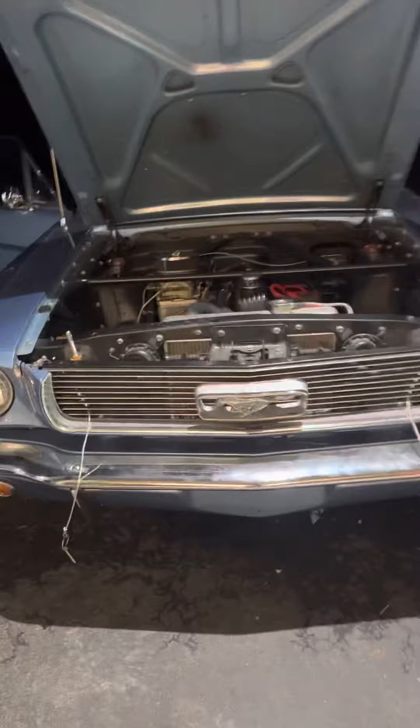Okay, I just want to make a quick little video here about T5 swapping these early six-cylinder Mustangs. This is my '66. Aluminum headers, roller rockers, all the good shit. Originally, this was a C4 automatic 3-speed car. Then I went and switched it to a 3-speed top loader car. I put all the mechanical linkage in there and whatnot.

And now it's going to go T5, and the T5 is sitting over here in the passenger seat. Car's waiting to go up on the lift tomorrow. Got a buddy who's going to help me out. I'm going to throw it in there. Hopefully it should be a one-day job. As you can see, I pulled the transmission, the bell housing's off. Got the new flywheel bolted up. It's really just waiting on time to get it in there.

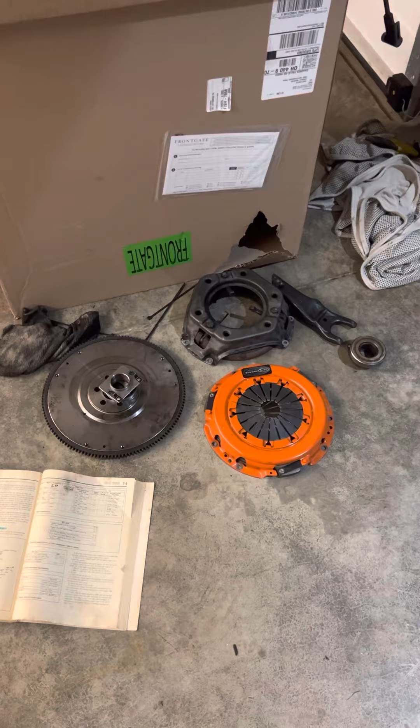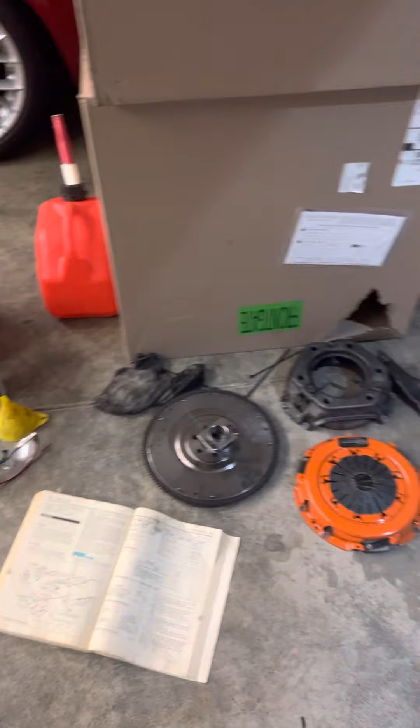But I wanted to make a quick video kind of about all the information I've collected on, one, how to manual swap these cars, and two, how to do the T5 in it, or what I think is the best way to do the T5 in it. At least the way I'm doing it. Because there's not a lot of information on how to modify, especially hop up the 6. And I feel like the more videos people make like this, the better off everybody will be.

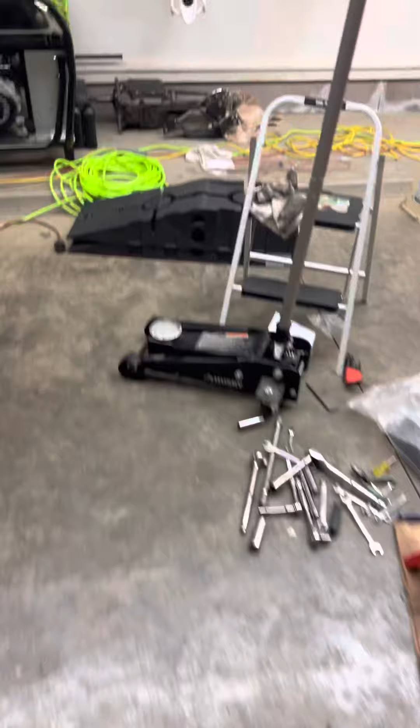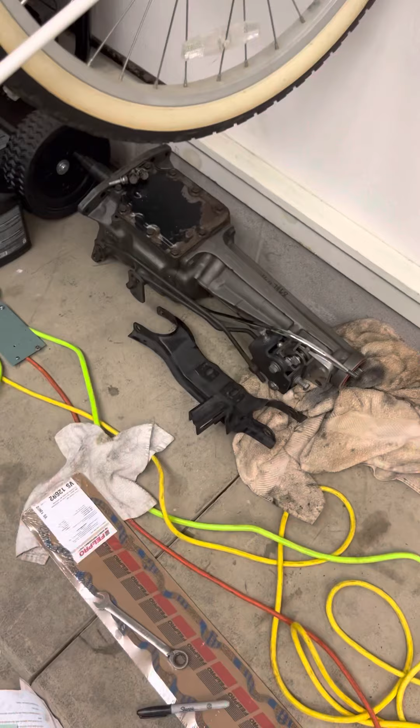So I guess we'll talk 3-speeds, and we'll talk top loaders first. So this is a 3.03 top loader, and the other option for a 3-speed top loader would be the 2.77. They're fine. They work really great. I thoroughly enjoyed mine. Having the dogleg first gear was pretty cool. Dragged this one out of a barn. I bought 2 of them for 120 bucks. They're everywhere. Look on Facebook Marketplace. You can find one. The 4-speeds are pretty plentiful too, if that's the route you want to go. Because it's definitely cheaper than the T5.

That being said, none of this is cheap. None of this is about competing with V8 cars or, you know, arguing about who's going to be faster or whatever. I don't really care about that. And I think if you own one of these 6-cylinder cars and you hop it up, it's not really what it's about. It's more about if you want to do it and you want to make something cool.

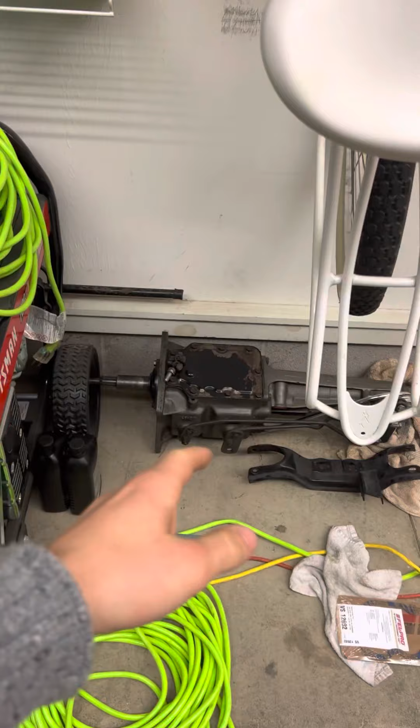Anyway, so the 3-speed top loaders, you got the 2.77 and 3.03. The 2.77 is pretty much junk. Came in only 6-cylinder cars. It doesn't have a synchronized first gear. Not super great, especially when they're as plentiful as they are. So I think if you're going to get one of these, you're better off getting the 3.03 or upgrading to a 4-speed of some kind. That being said, if you just want to manual swap your car and then eventually you're thinking about a T5 swap, that's what I did.

The 3.03 is the way to go for one very important reason. It has a 28 spline output shaft. Conveniently enough, the T5 also has a 28 spline output shaft. So the yoke that Modern Driveline is going to send you is going to be 28 splines. And in theory, if you already did that swap, it'll slide right on. Also, I measured that in the car and measured the T5, mocked it up with the adapter plate and whatnot. Comes in with maybe a quarter to a half inch difference, the T5 being about a quarter to a half inch shorter. So I think I'm going to get away with the stock drive shaft without having to modify it.

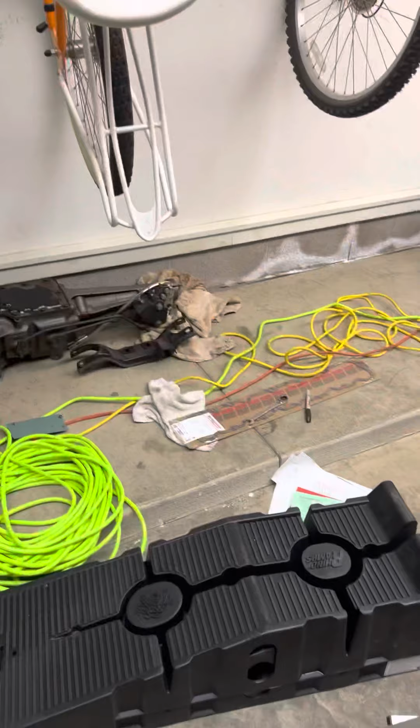The other thing is if you go top loader, you can use the mechanical linkage, okay? Which I have pieced together in this car. It's all new stuff. You can buy it from CJ Pony Parts. This is the equalizer or Z-bar. There's the push rod for the clutch pedal. And then there's another push rod, which you're not going to be able to see, that actually pushes the clutch fork, otherwise known as the release fork. But the bell housing is not in. Obviously, the clutch fork is not in, but it would be right there.

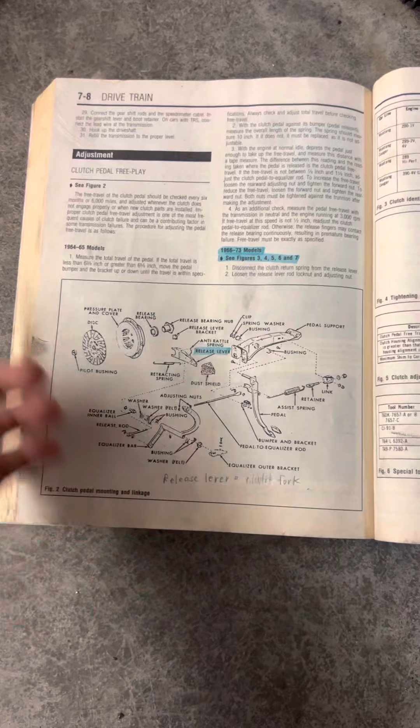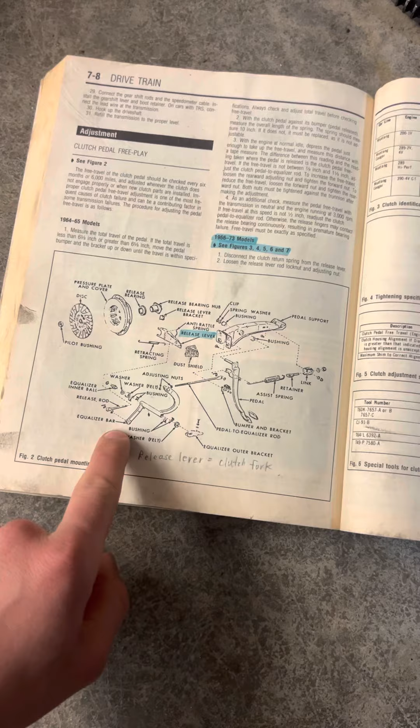Had great difficulty figuring out what the fuck this clutch linkage looked like when I was doing the swap initially. So I got myself a Chilton manual, and they actually have everything laid out pretty nicely. This picture is, for whatever reason, stupid hard to find, but this is absolutely everything. They call a few things a different name. They call this an equalizer bar. A lot of people call it a Z-bar, I guess because it vaguely resembles a Z. They also call the clutch fork the release lever. Whatever, tomato, tomato. But that is the picture you're looking for.

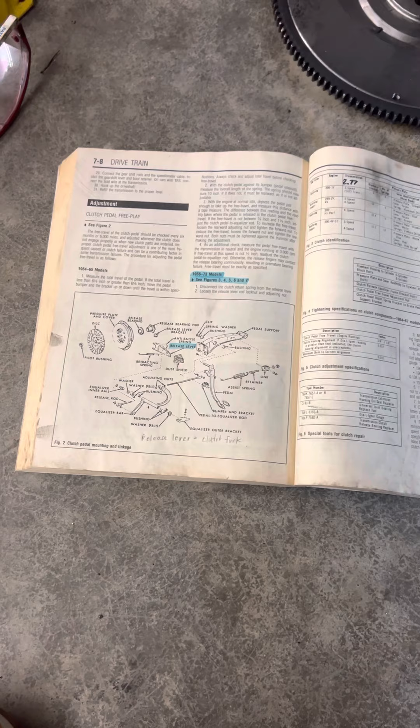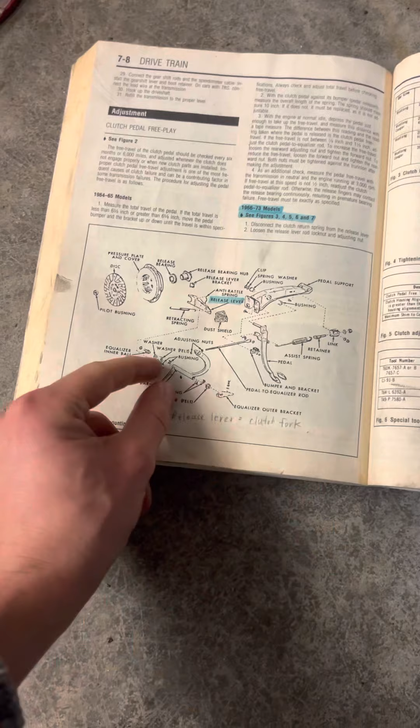And as much as I don't like their prices, CJ Pony Parts is actually the best place to get all of the 6-cylinder linkage parts, because there are at least 2 parts that are 6-cylinder specific. It's been a while since I've done this swap, but to the best of my memory, this Z-bar is actually longer because the V8 is wider in the car, and this Z-bar mounts to the kind of pseudo frame rail that's in the car. So it has to be longer to compensate for the skinnier sort of package of the 6-cylinder.

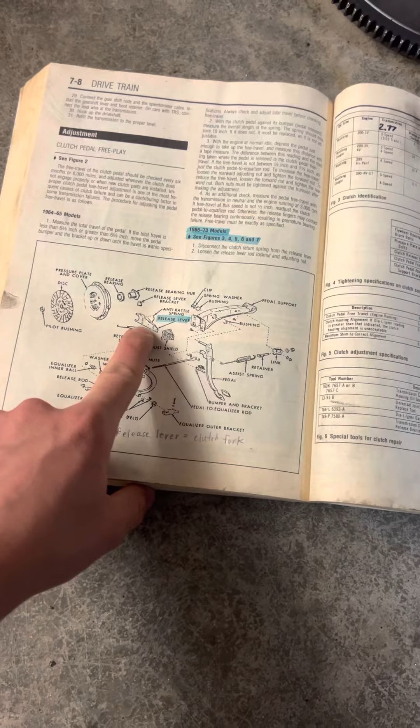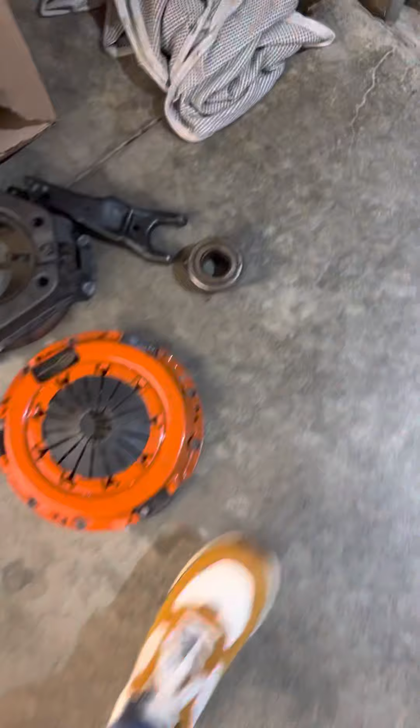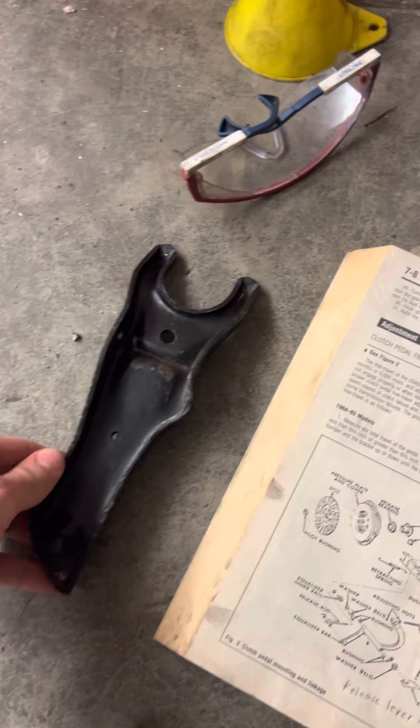So the Z-bar is 6-cylinder specific, and the clutch fork is 6-cylinder specific. This one right here, I assume is the V8, which is different than the 6-cylinders, of course. But there are actually 2 different 6-cylinder clutch forks. This is 66, looks something like this. Not super interesting, but it's actually the wrong one for my application. I needed the longer 67 specific clutch fork. As you can see, the throwout bearing sort of just clips onto these.

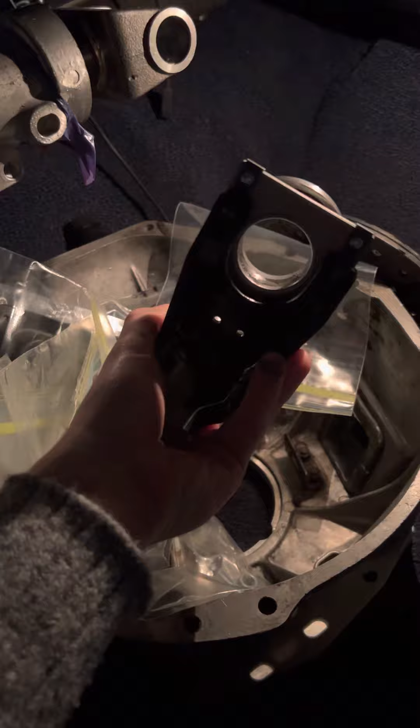And if you're gonna get one of these, spend the extra $5, get the little anti-rattle spring. That's what this little clippy jobby is. Just save you a headache. One less rattle on these cars, which is always nice. Okay. So that sort of covers, I think, what I wanted to say about the clutch linkage.

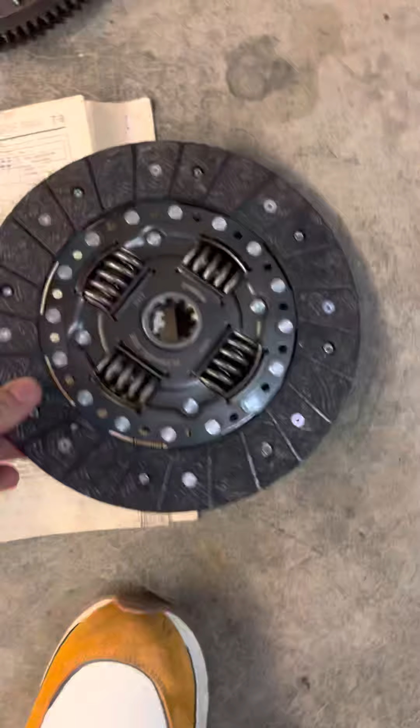The other thing I wanted to say is you're going to have 2 options in terms of flywheels and clutches. You're going to have this 9-inch, and you're going to have the 8.5-inch. In my opinion, I think the 8.5-inch is total junk. I think if you already have one, it's worth keeping to cut the cost down, because I know everybody's worried about the cost of the T-5 swap. You know, it's like, oh my God, $3,000, that's a big price tag. Cut it down however you can. And I completely understand that.

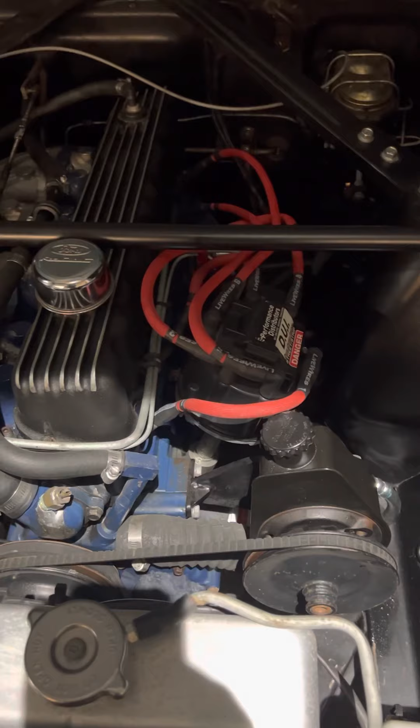That's sort of why I decided to go mechanical linkage, because the hydraulic throwout bearing, one, is much more work, and it's not cheap. It's like 500 and some bucks, I think. And you're gonna have to run into a different pressure plate and where to mount that reservoir and all kinds of stuff I really didn't want to do. So I stuck with the mechanical linkage, which nobody does, I know, but it's really not bad at all. I quite like it.

Anyway, 8.5-inch, I think it's total junk. 9-inch, I think it's a better option. And there are better bell housing selections for you if you go 9-inch. They're also a lot easier to find. Yeah, so this is a 9-inch, and it needs the corresponding 9-inch clutch and pressure plate. The 9-inch clutch is right here. These are the 2 different pressure plates, okay? This orange one is a diaphragm style, and this steel one is a 3-finger style.

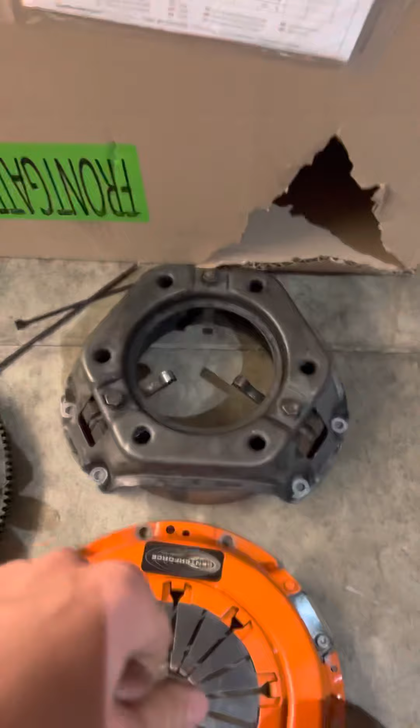Okay, so a lot of the clutch kits you will see for these 6-cylinder Mustangs come with this style pressure plate. There's nothing particularly great about this style pressure plate. If you call Modern Driveline, they're going to tell you the 3-finger is not your best option. Unnecessarily heavy pedal feel, doesn't hold as much power, etc. And they're probably going to try to convince you to go with this diaphragm style. Problem with that is the diaphragm style clutch kit that they sell, I think, is like $370.

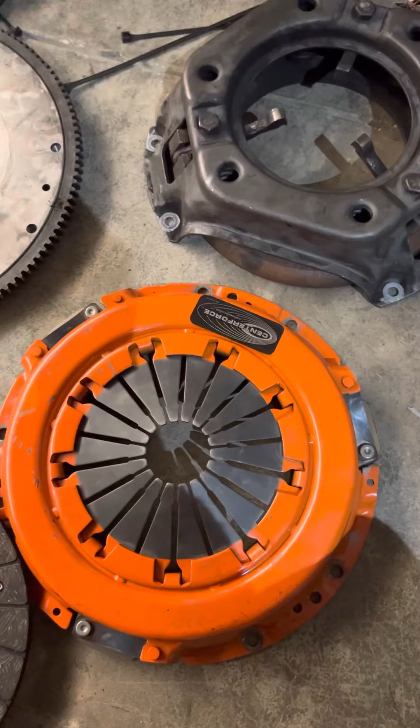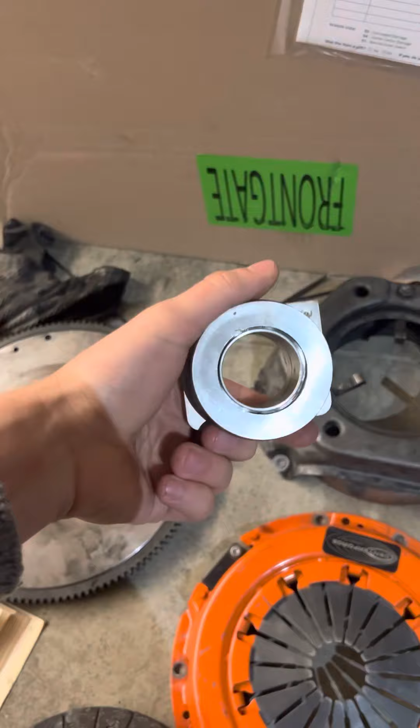You can buy a clutch kit from this terrible company, which I don't recommend you buy a clutch from. Zoom Premium Clutch Set. Whatever that is, right? I think it's like $170 for the clutch. It's fine. The clutch is fine. The pressure plate's fine. It comes with this 3-finger style. But yet another example of aftermarket parts companies being total garbage and not doing their due diligence is this is the throwout bearing they're going to send you with this clutch kit. Okay? This is the exact one out of the kit.

And this is the throwout bearing Modern Driveline sells on their website for top loaders and for V8 applications, and for T5 applications. The throwout bearings are the same, okay? Both of these will fit on the input shaft of a top loader and the input shaft of a T5. I could show you that, but it's in the car right now, and I don't really feel like wiggling it out of there to show you. So take my word for it, they do.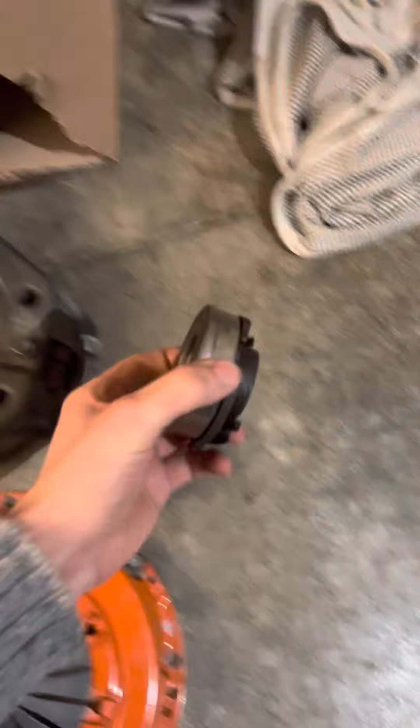The problem with this throwout bearing, it's fine, it's a good throwout bearing, is that it does not sit on the 3 fingers. See how it's falling in there? Okay. This is the throwout bearing it should have in it. See how much wider it is? Okay. This one's bad.

It should not rattle like that. But see how this can sit on the 3 fingers? Okay. That's because this is for a 3-finger style. This is for a diaphragm style, as you can see here. See how it fits on there nice? Okay,

so if you want to go that route, you can buy the Zoom clutch, which doesn't even know what the fuck throwout bearing they're putting in their clutch kits. All they would have taken is 2 seconds to check it on the pressure plate, but they didn't.

Or you could spend the $370 to do the diaphragm clutch from Modern Driveline. Or I think you could spend, I think it's like $300 and some change to get the Scott Drake kit. The Scott Drake kit comes with the right throwout bearing. So that's something you don't have to worry about. But again, it's a lot of money.

So if you want to sort of cut the cost on that, or let's say you've had the 3-speed, the clutch and the pressure plate are good, the flywheel's good, and you just want to rip this thing off, put the adapter on the bell housing, and slap the T5 in, but you just want to change the throwout bearing, which is what happened to me. I saw this throwout bearing was going bad. I was like, all right, I'm just going to get a new throwout bearing.

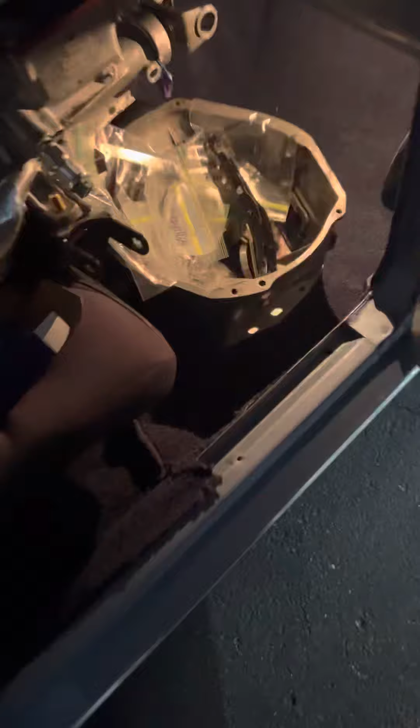Didn't want to spend the $370 for a new throwout bearing. Didn't really feel like upgrading to the diaphragm style. So I was looking for this throwout bearing. This throwout bearing is very hard to find for whatever reason. Napa and everybody and their mother has discontinued it. But you can still find this throwout bearing on eBay under what part number? No, I've got the box right here. Here it is.

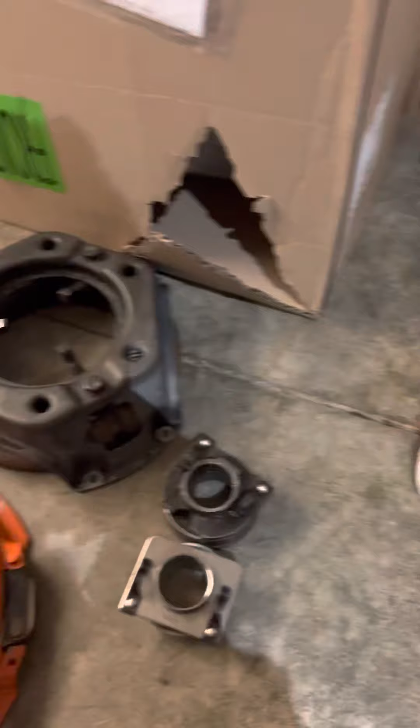Okay. This is brand new, old stock. That's the part number you're looking for. Okay, this one. BCA is just the company. And they can get you the right throwout bearing for these 3-finger clutches. Let's see how much wider? I guess it's kind of hard to tell. But if I stack them up, see? Doesn't seem like a lot, but it is. And this clutch will not engage right, and you will have terrible pedal feel.

So, 9-inch clutch, the way to go. If you stick with the 3-finger clutch, this is the bearing you need. If you go to a modern diaphragm style like this, you can use this style, which again is the V8 style, whatever. And if you're wondering, this pressure plate is not the one that Modern Driveline sells. This is a pressure plate off of like a 90s Taurus SHO.

You could buy this pressure plate in their clutch kit, but their clutch is not going to work for you because it's a different spline. The T5 and the top loaders, for that matter, are both 10 splines. I think the SHO engines and the SHO transmissions and like 80s Escorts use like a weird 28 spline kind of deal. But this pressure plate will actually work.

But if you're looking for a performance option for these 9 inches, there used to be like nothing that existed. Turns out, if you're going to do this T5 swap, the SVO Mustangs also have this 9-inch clutch. It'll fit in the bell housing. It'll be a 10 spline because they use world-class T5s. And it will line up with this flywheel

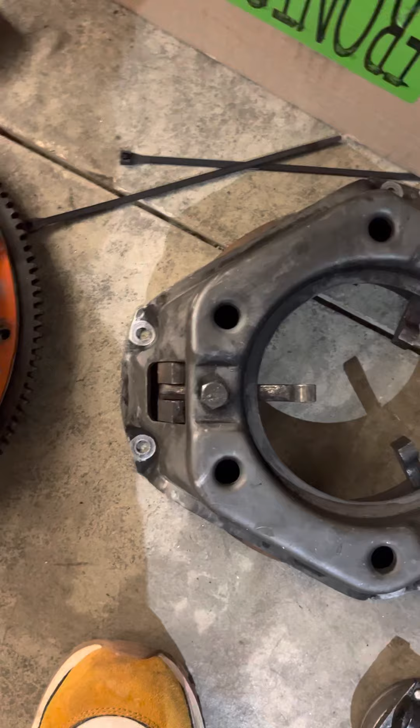on the bolts here, see? Hard to do with one hand, but I'm gonna do my best to show you. Prove my point. There you go. Had it bolted up in the car. Seems like it would work. You just got to use the 9-inch clutch. Fits in there quite nicely.

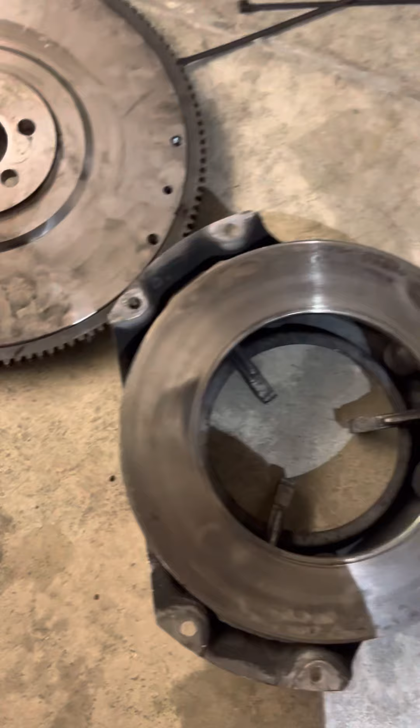So I can see, we'll flip it over here. Grab our clutch. Okay, so see, got a little bit of excess. That's pretty well centered. Best I can, at least. Pretty well centered. As opposed to the stock style pressure plate. This one's got some nice hot spots on it. Still has that little bit of overlap. But should be fine. Very, very similar.

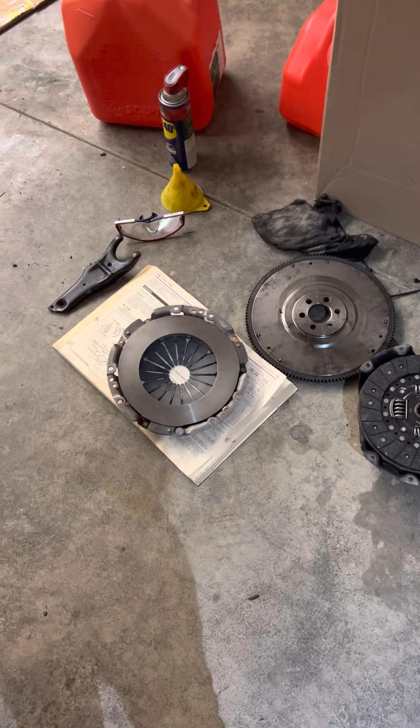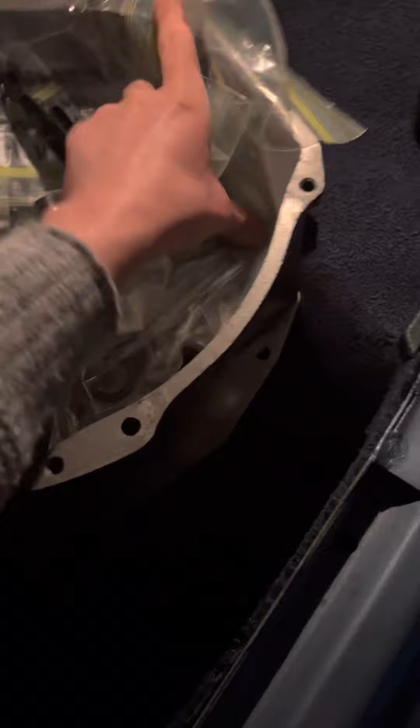So anyway, that's a little bit of down the rabbit hole with the clutch stuff. The other thing you're going to need if you're going to do these T5 swaps is a bell housing, obviously. So if you have a 67 car, you're in luck. And if it's a manual, you might have one of these already. Get all the parts out of here. Try to grab this one. It's not super light despite it being aluminum.

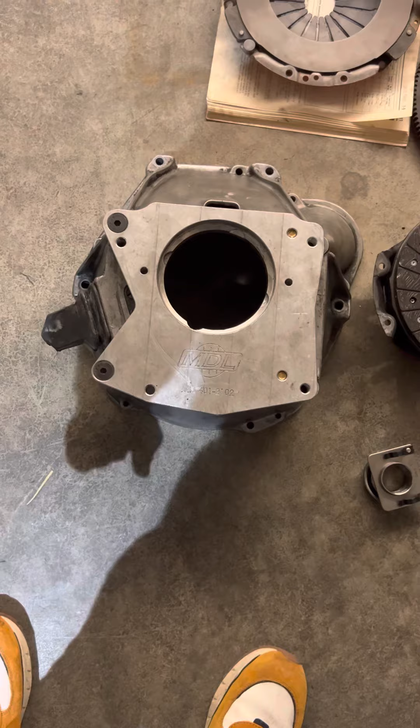Modern Driveline has a wonderful page about all the different bell housings that came behind these 6-cylinder cars. This is the particular adapter I needed for mine. The serial number is stamped beneath this. I'm not going to take it off, but I will post the serial number in the description of this video.

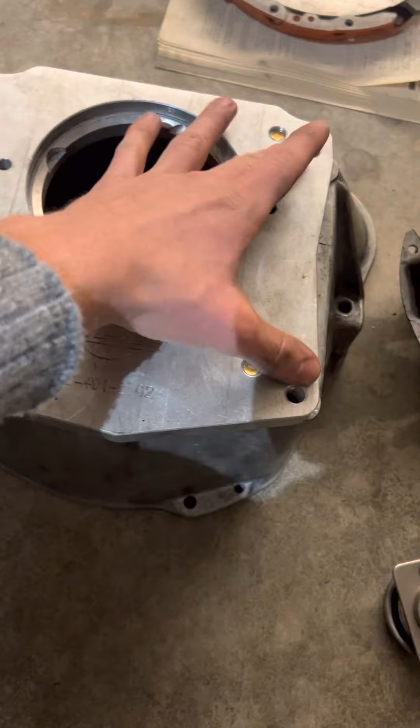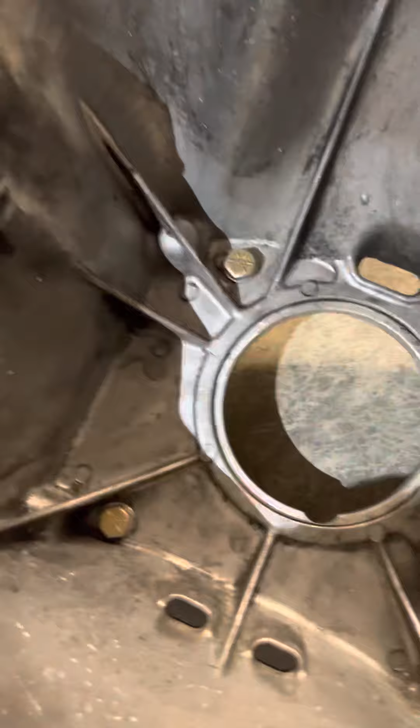But that's how the little adapter plate mounts. So your transmission bolts here and here, okay? And then you do have to drill 2 holes in your bell housing. Wasn't hard to do. And then you put 2 screws in from the other side. Okay? And then these bolt on flush. So pretty easy setup.

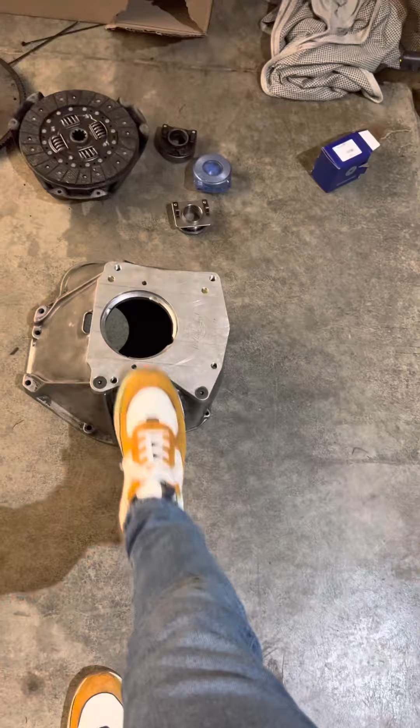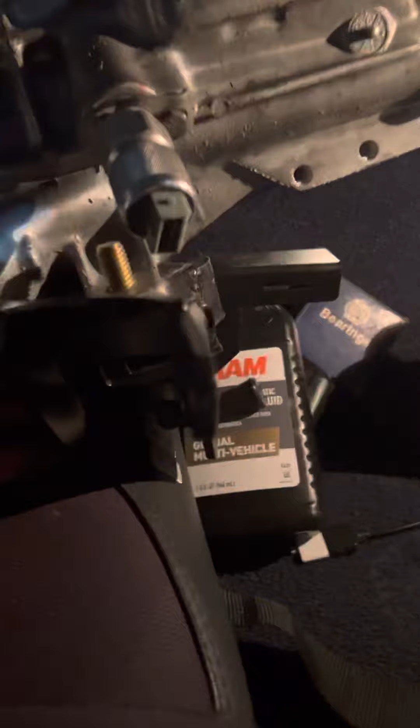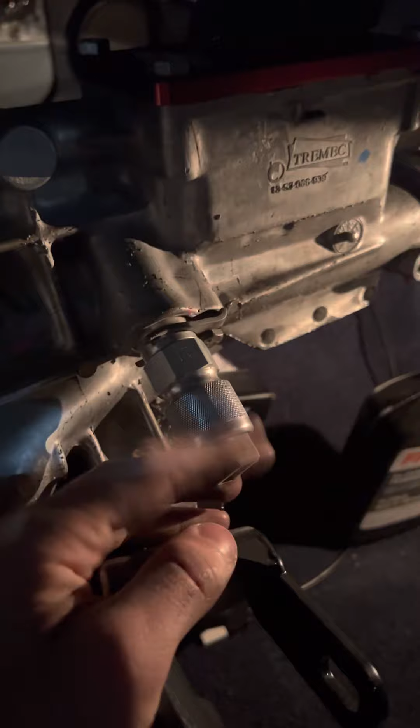So you need a bell housing, figure out what's going to work for you. And then the other thing you're absolutely going to need is this cross member that has sort of a setback to it. And if you've upgraded your gauges like I have, you will not need their little speedometer piece. The one that works for the top loader will work in this.

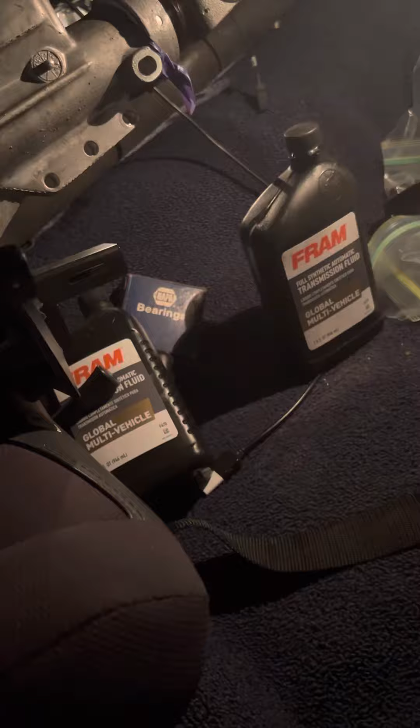The other thing they're going to try to sell you is this offset shifter, but it doesn't look very offset, at least to me. It's also a short shifter, which is not what I wanted. It's not my personal preference, but I'm not sure if I'm exactly going to need it until I stick this up through the floor. So I will get back to you on that, but you're definitely going to need the shifter. 3 quarts of ATF. With the Fram, at least I got the full synthetic.

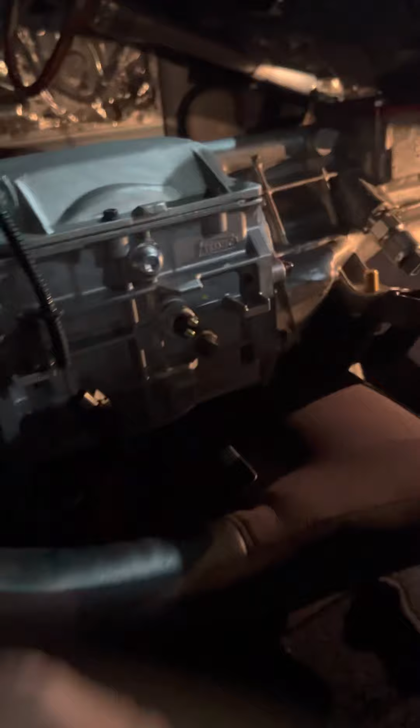And they're going to sell you this little harness. You splice your reverse lights. It doesn't matter which wire you wire to what. Your reverse lights are still going to work. They're both black, that's why. Let me think, what else? I mentioned if you've got the 3.03 top loader, you're not going to need that output shaft. The yoke. I think it's the yoke. I think it's this bit here.

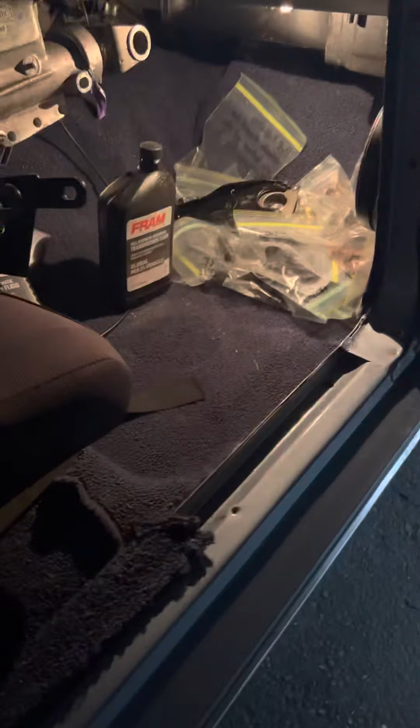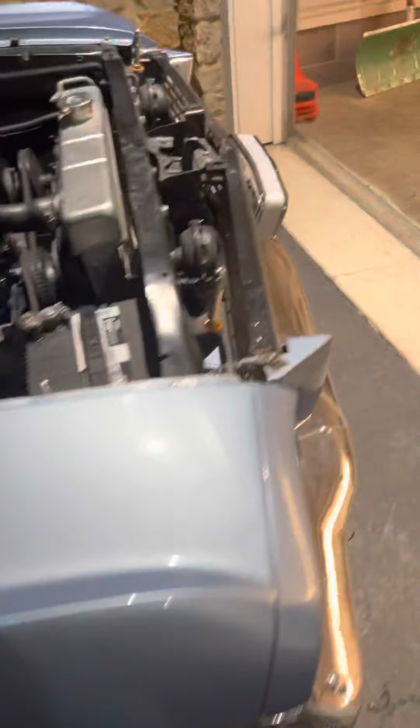Talked about the clutch forks, how they're different. Talked about the 2 different styles of clutches, 2 different styles of pressure plates, 2 different styles of bearings. Just stuff that I feel like is not super talked about on these cars. And I think that's everything. Let's get a T5 into this car. You can use that mechanical linkage. You can reuse it, which is what I'm gonna do. I don't know if I mentioned that already. But that's everything really that you need to T5 swap this car. There's not a lot. Like I said, the drive shaft should be okay.

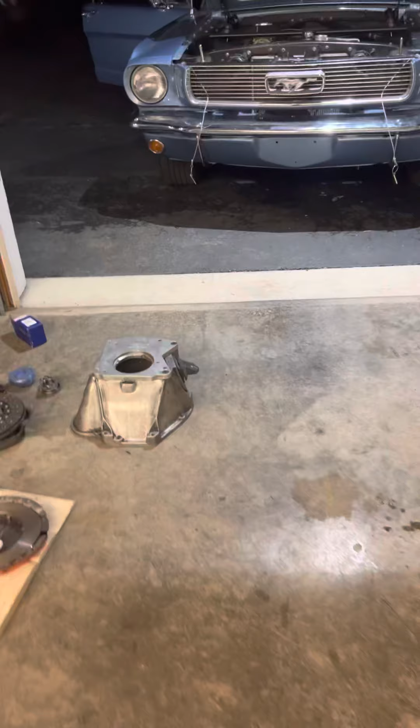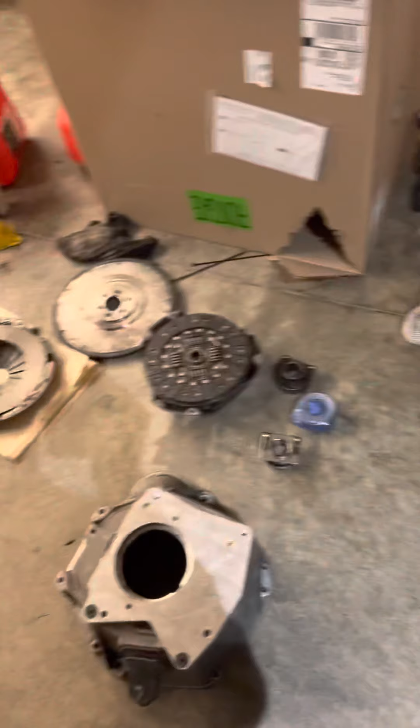The other thing is, if you went with that super competition shifter on these top loaders, it is the same arm as the T5 shifter. So if you didn't want to buy a new arm, I don't know why Hurst charges so much for those damn things. It's like $50 to $70, I think, for the arms. So if I were you and you were swapping from an automatic, I would take a little piece of cardboard and figure out kind of the shape and length of the arm that you want, because they are not cheap. You can also find them used on eBay every once in a while.

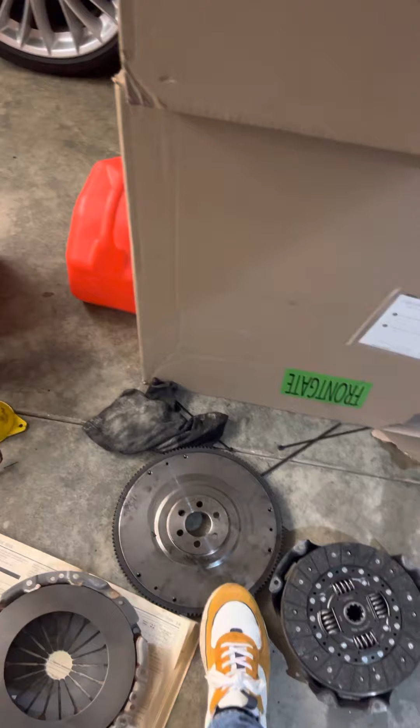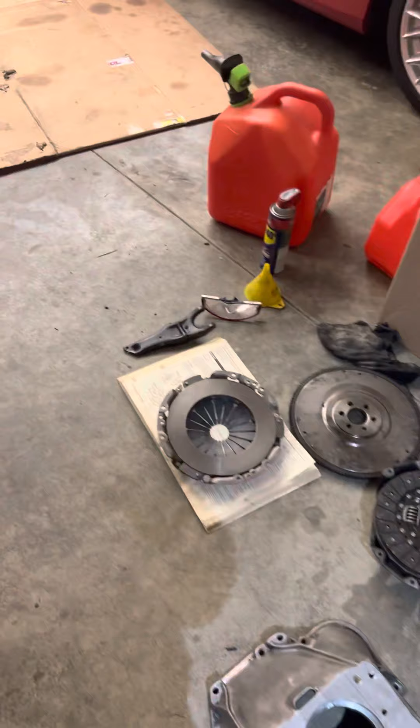Also, forgot to mention, these flywheels, these 9-inch flywheels, and more so the 8.5-inch, are difficult to find. But now Modern Driveline is reproducing them. I think they make a billet one, and I think they make a steel one. I think this is the billet one. Still weighs a ton. They charge you for it. I think it's like $340. No, I think it's less than that. I think it's like $300. But definitely worth it.

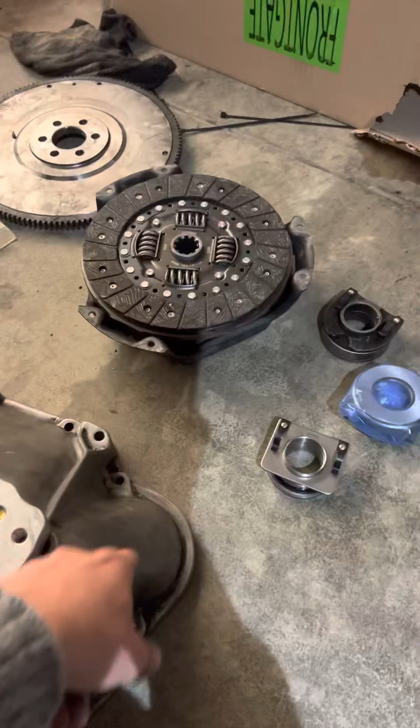Also, one more thing. I'm just trying to spew all the things I remember about doing this. These bell housings: the automatics use 3-bolt starters. These use a 2-bolt starter. So you're gonna have to keep that in mind. And I would do it the way I did it with this particular bell housing, because I know the clutch fork that works with it is that longer style available at CJ Pony Parts. And I know this will accept both a top loader, and Modern Driveline has a relatively simple adapter for the T5. So that's the way I would do it. That's the way I am doing it. I think it's going to be a sweet little car once it's done.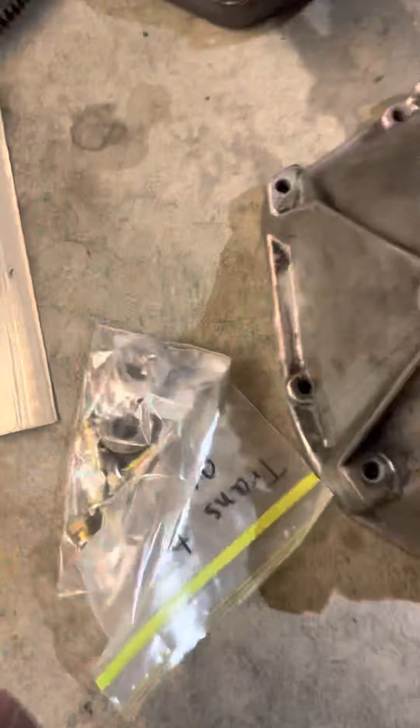Exhaust, take the exhaust off. This actually mounts. Oh, that actually reminds me. Okay, yeah. There is this book that's going around. It's been around for years, and it's like the Ford Falcon or something other guide to 6-cylinder performance. I think the book is a good start. Otherwise, I think it's full of really outdated information, budget swaps. And if you're serious about making these cars go fast, I think it's kind of wholly unuseful.

And I think the better resource for you is the Classic Inlines website that you now have to go through Vintage Inlines to get to, which is awesome. It's covered in broken links and all kinds of other crap. But whatever, at least we still have that website. In that book, they talk about doing a T5 swap. Okay? Put this down for a second.

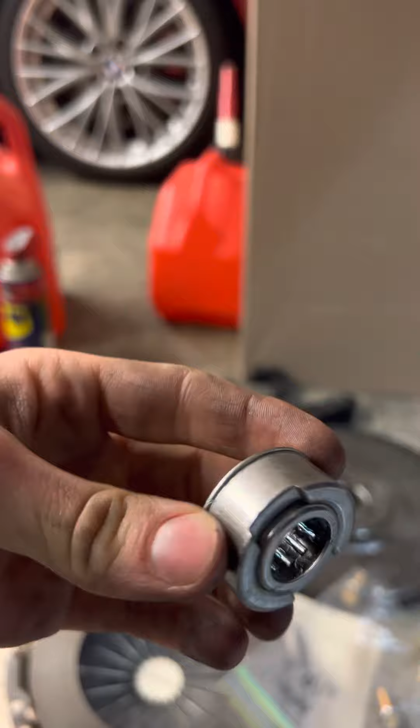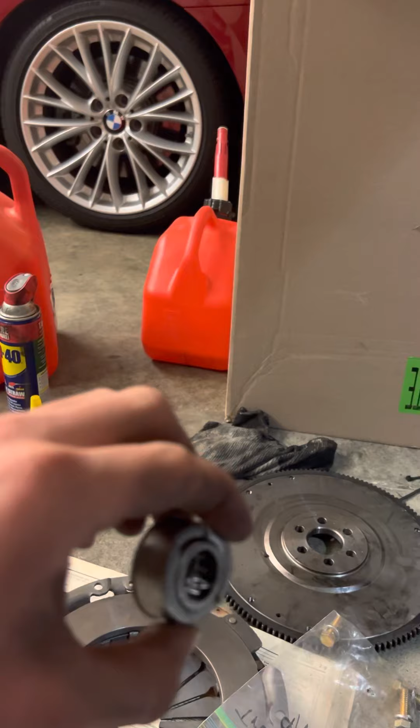And they say you need a particular pilot bearing for the T5 swap. Okay? They say you need a roller style pilot bearing. Something that looks like this. See, it's an actual bearing in there. Little roller bearings. This came with the Zoom Performance Clutch Kit or whatever. Seems like a nice piece. Seems fine. Spins fine.

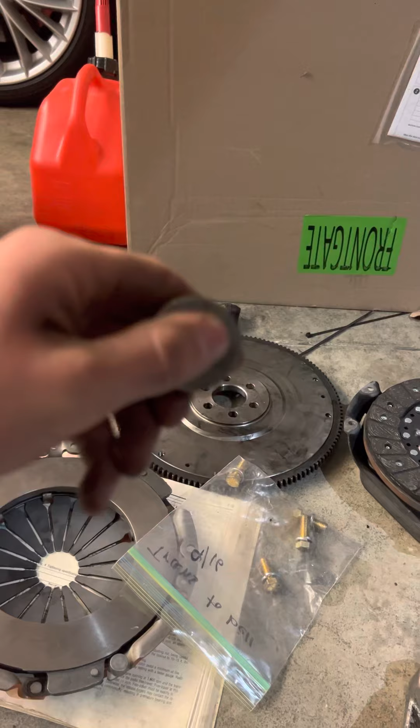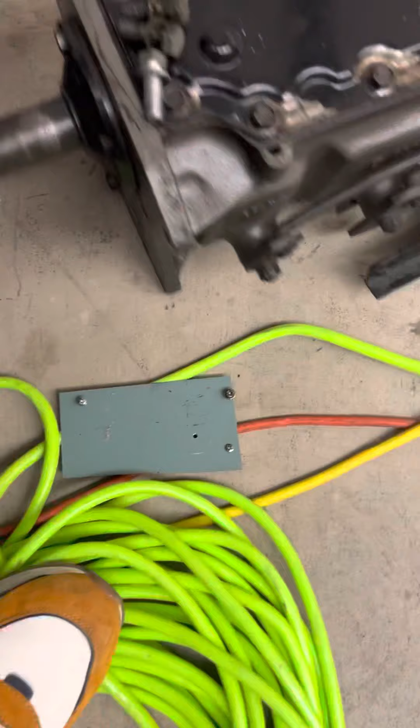This is the Ford top loader pilot bearing. I'm sorry, this is a bushing. I will show you that this fits on the top loader. Transmission weighs a ton. Okay, fits on there nice, tight fit. And it also fits on the T-5, as you can see here. You don't need a roller pilot bearing. I don't know why that book says that.

I have talked to Modern Driveline about this to no end. I don't know if these are 6-cylinder specific either. I ordered this one from Modern Driveline because I thought I needed it. I thought it was going to be different than the top loader. It is completely the same as the one that is in the block right now. So I don't know why it says that.

But that is the other thing I kind of wanted to mention: you don't need this roller bearing. I guess it's nice to have. It's probably nicer, but the bushing works just fine. It's really just supporting that input shaft. So, I think that's everything. I think I got everything right. I'm sure somebody will let me know if I didn't. But I'm out here doing it. These things have worked for me. Swapped that 3-speed in. Know for sure that all works.

Other thing really quick is a lot of the parts websites, like CJ Pony Parts is guilty of this, Summit Racing, all the JEGS, all the other ones, they talk about V8 specific parts. These are the Koni Classic single adjustable shocks. They work beautifully on this car. It's a 6-cylinder car, obviously.

The Global West suspension kit, they're tubular arms. They say they don't fit on the 6-cylinder. There they are, all hooked up. They work beautifully on this car. One thing, though, to be aware of, is if you're running headers, these are Hooker headers by Holley. These were the only set you could get that were long tube headers for this car. They are ginormous. And boy, are they a bitch to get in this car.

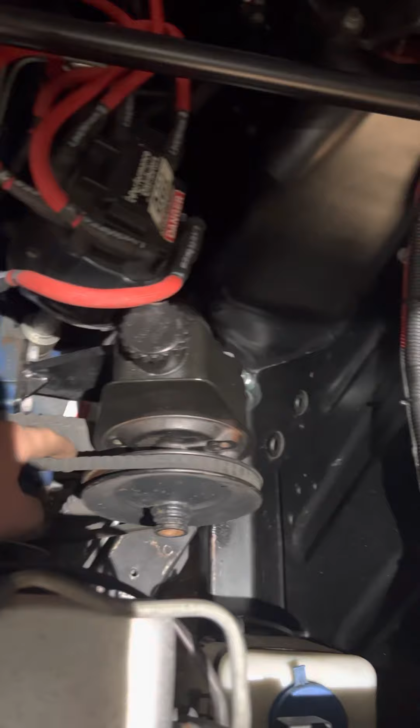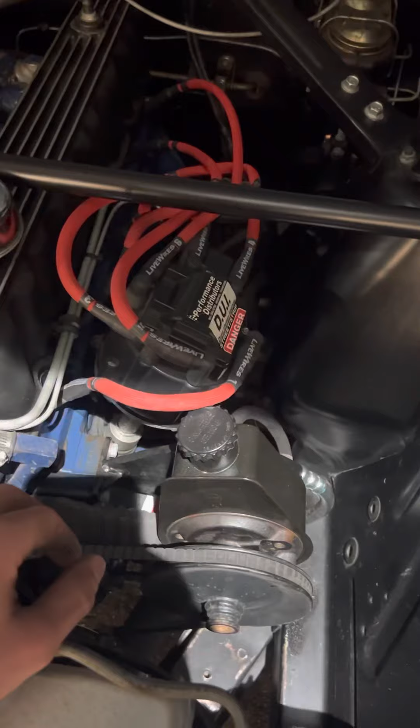But the control arm bolts come out right here, and the header clearance is very tight. I actually had to trim this bolt of the control arm to get it to fit. So that's one thing there. The other thing is, if you're going to do this DUI distributor, you have got to go to the Ford LTD style power steering pump, because it will not clear. If you have a factory power steering car, the reservoir is giant. Had one on this car, got rid of it to do that little power steering upgrade.

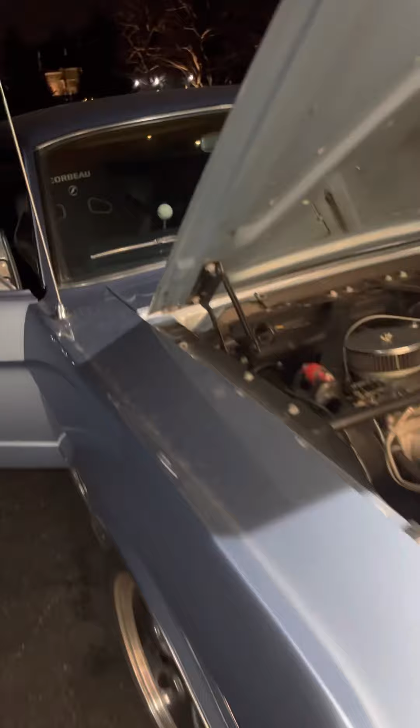The other thing is, I think Addco makes it, an Addco rear sway bar that they say is V8 specific. 6-cylinder cars didn't come with rear sway bars. If you want to do one thing, I think it costs you like $50 to drastically improve the handling of this car. And I mean drastically. Do that little Addco sway bar. It's easy. Take an hour at most, even if you're not mechanically inclined. I think that's all of the V8 specific parts that actually work on these 6-cylinder cars that I have on this right now.

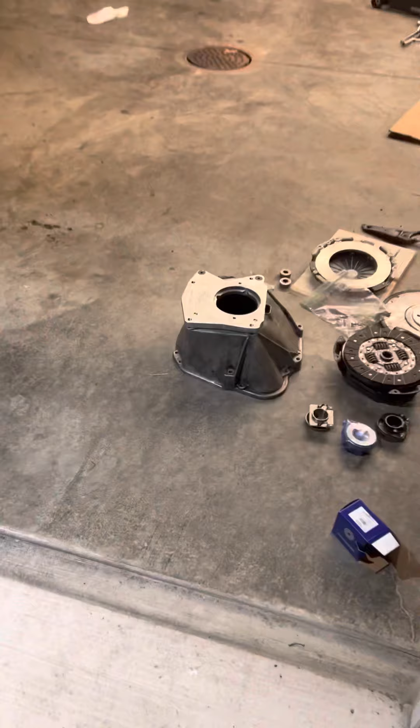So, all right, well, I hope this helps. I wish you the best of luck. I hope I see more people doing this T5 swap, because you can do it on a budget. Other people have got great videos about how to pull a T5 out of a junkyard that'll work for this application. So, best of luck to you.